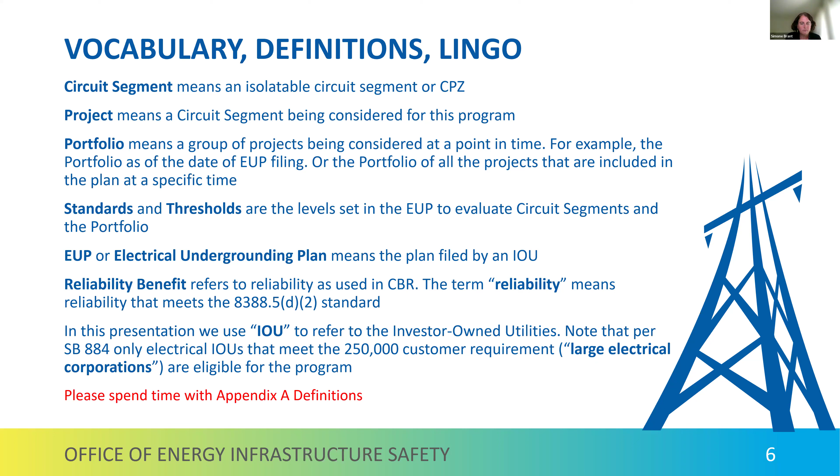There are three main components of the guidelines. The first is the portfolio mitigation objective—that's what you're hearing us refer to as the D2 standard, which is whether the plan as a whole is achieving the substantial increase in reliability and substantial decrease in wildfire risk as defined by SB 884. The second component is the project acceptance framework, which is a 4-screen process used to select and prioritize projects. The third part is that we have quite extensive requirements in terms of data submission, model information, modeling and ongoing reporting. That's how we'll monitor over time whether the portfolio mitigation objective is being met, as well as whether the framework is being applied as approved.

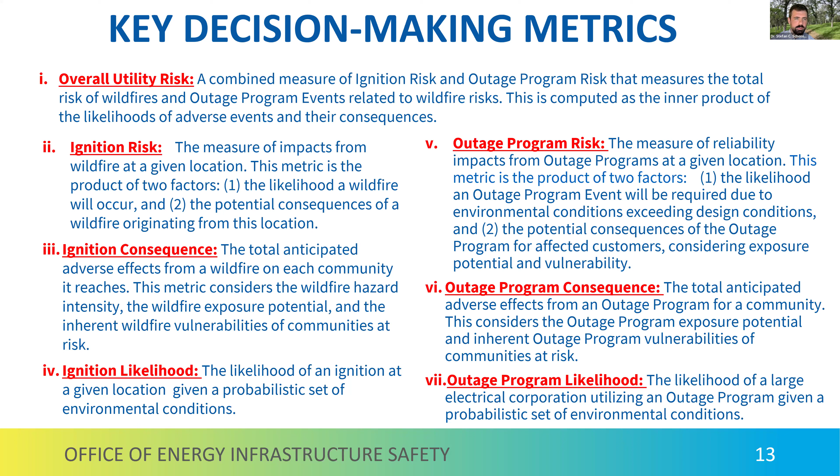The outage program likelihood, we have a slightly informal definition here just for reason of space. It's a little longer if you go to Appendix A and read it, but it's the likelihood of an outage program being given and also the expected time of that program. And we specifically ask for the IOU to detail how they balance out something like 3 2-minute outages versus a 10-minute outage, and we ask for some reporting on that.

Next slide, please. So with these key decision-making metrics, we've essentially identified 3 different types of projects which will achieve a substantial reduction of risk.

So the first and most basic type are what we call high-risk circuit segments. These are circuit segments that unmitigated exceed some type of high-risk threshold. This threshold, again, is measured only in overall utility risk. And in order to set up a success standard or a mitigation criteria, as we call it, we ask for the Electrical Corporation to define an explicit formula of overall utility risk and additional key decision-making metrics that they believe are important to establishing a successful project.

Our second type of project are ignition tail risk circuit segments. And the circuit qualifies for this program by having a consequence score which exceeds some predetermined threshold. Again, all of these thresholds we have not set exactly because we need to see the context of the entire system to understand what is a good threshold, what is not a good threshold. We ask for the IOUs to present a threshold in their plan, and we will review it and potentially make modification requests depending on their appropriateness.

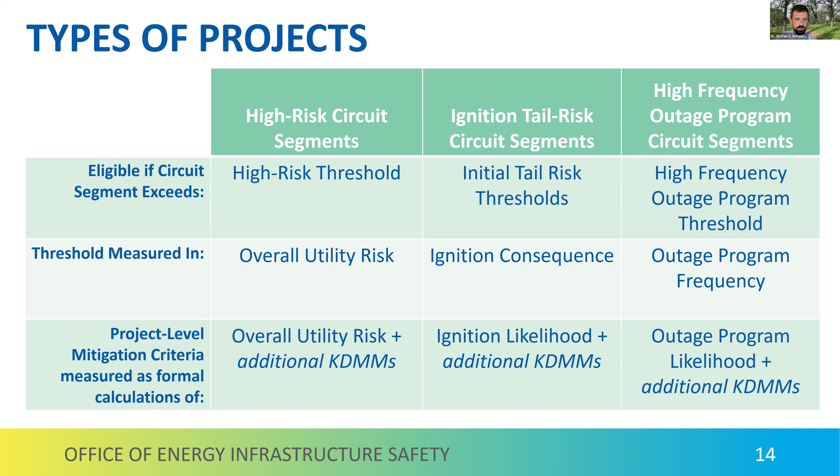This is measured in outage program frequency, which we have a slightly longer, more formal definition in Appendix A that you should check out. And this one, we don't have a mismatch. We measure the success of this in our outage program likelihood measurement, but then if there are additional metrics which the IOUs believe are important for valuing these projects, we leave some room for them to propose the actual formal success criteria.

So we'll do a quick explanation again of each of these types of projects measured here on a risk matrix. For those unfamiliar, there's lots of ways to do these. We right now have the x-axis as the likelihood of an event happening and the y-axis as a consequence. I should note these are example plots meant to help illustrate the concept. They are not drawn to scale, and they do not represent any formal thresholds which we've set. They're illustrative purposes only.

So again, here our risk is our product of our likelihood and our consequence. So the top right corner is high likelihood, high consequence events. This would be our most risky circuits. Things in the bottom left of this would be low likelihood, low consequence, and not risky. So in red, we've marked a circuit which is a high risk circuit.

Then after doing some mitigation, potentially undergrounding, which only affects the likelihood of the adverse event at that circuit, you see it is moved all the way over to the left into some safe zone defined by this mitigated risk threshold. Again, thresholds that we have not set formally because we need to see all of the context information in order to set them appropriately.

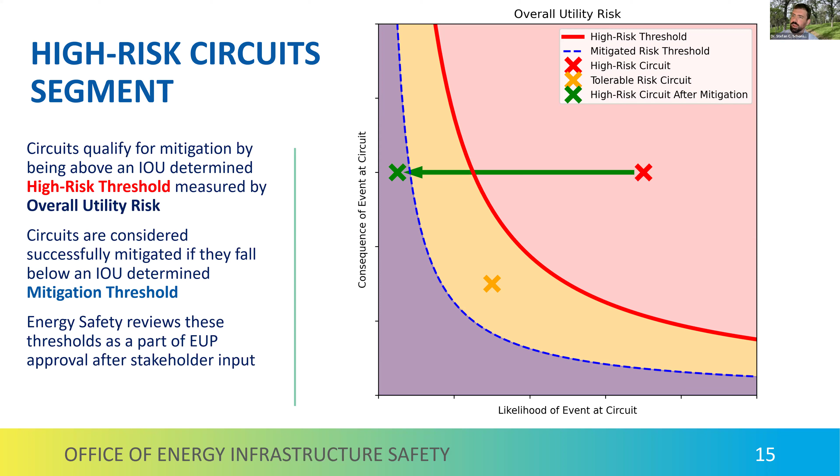So next, one more thing on the previous slide, if we could. I just want to note that we are here showing this in overall utility risk. So we look at likelihood of the event and consequence of the event. This is a combined measure of the outage program risk and ignition risk. Thanks. Next slide.

So outage program risk, or high frequency outage program circuits, are measured in outage program risk. So now our x-axis is the likelihood of an outage program at the circuit, and the y-axis is the consequence of that program. Here we are narrowing in on these high frequency power outage circuits. So the threshold is a measurement purely of likelihood of the outage program.

The success threshold, again, we haven't set a specific one, but we've drawn an example here of something that we'd like to see. This is a little different than the previous example, because we're only affecting likelihood with undergrounding. So when we measure the success of a program or a circuit being undergrounded through this program, it's important that the likelihood itself is much lower, that we don't really affect the consequence with this type of mitigation, and therefore the likelihood is the key determining factor in whether or not this is a successful mitigation.

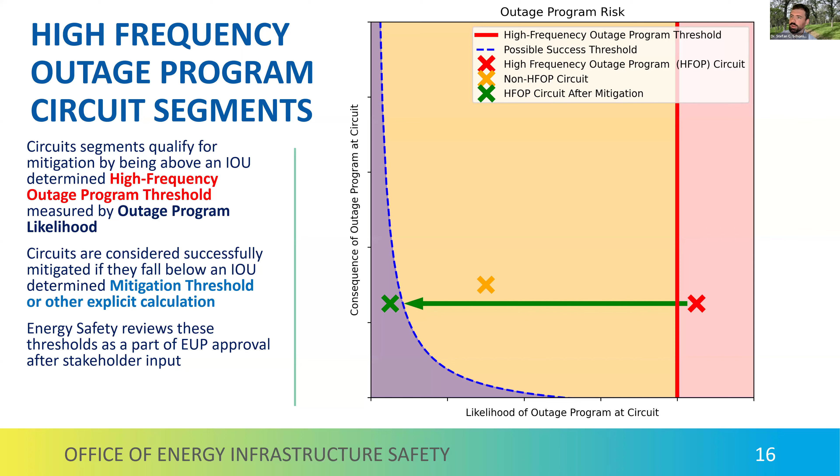The third type is our ignition tail risk circuit segments. Again, these ones are a little special because we're concerned with the consequence of an ignition at a particular circuit segment. If this consequence score is very high, then there is an argument that it should be mitigated regardless of likelihood. However, what exactly that consequence threshold is, is something that we need to determine, and we need more context information in the EUP in order to decide.

And since we're measuring the eligibility for this program in consequence, and undergrounding only affects the likelihood, measuring success here is a little bit more complicated. Rather than prescribing a specific formula for success here, we ask for the electrical corporations to define a success criteria in their plan, which we will review and comment on as part of our process. Next slide, please.

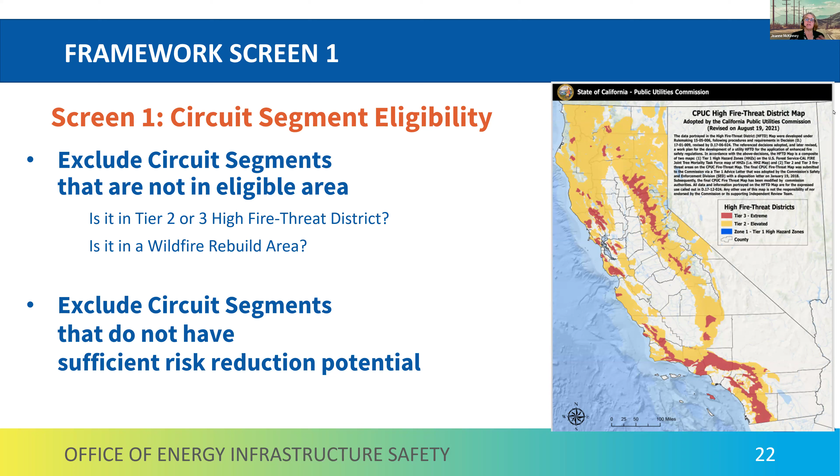And then the second part of screen 1 is to exclude circuit segments that don't have sufficient risk reduction potential. In other words, if they don't have a significant amount of risk, those aren't the ones that should be part of the program. So, next slide.

And then, as Stefan said, there are 3 different ways that a circuit segment might be deemed risky enough to be part of the program: the overall utility risk threshold, the ignition consequence threshold, or the outage program reliability threshold. And the ignition consequence threshold is the one that applies to tail risk. So if a circuit segment doesn't exceed any of these thresholds, it is not going to be part of the program, and it's eliminated in screen 1.

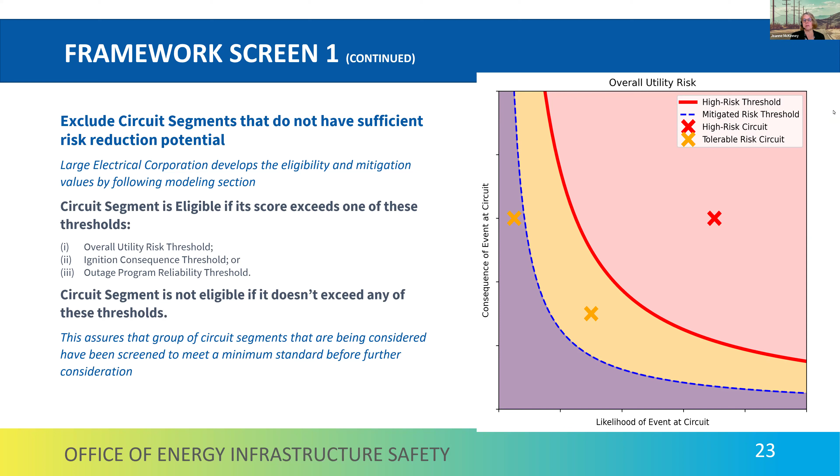So this is a very important part of the process, because this is what determines that we're working with a pool of circuit segments that really need this attention. And to go over to the matrix again, the risk matrix: the red X, that's the theoretical circuit that is above the red line, which is the high risk threshold. The yellow X's, one is in that yellow field, which is considered tolerable. And then the other one is in the purple zone, which is actually where we're looking for a mitigated project to be risk-wise after the mitigation.

So, next slide. Screen 2 is really about information and the alternative mitigation comparison. This is where we have required the utility to provide most of the information that's already listed in the CPUC resolution. SPD 15 has that appendix 1 with a long list of data. So we want that data to be part of what the utility gives us with screen 2.

And then they'll do this, and that includes some information on the alternative mitigations. Energy Safety will then use this because it will help us understand the potential for the plan to reduce risk and help us evaluate the portfolio mitigation objective and whether the plan is going to meet that.

However, when screen 2 is performed, the utility may not have all of the information. If that's the case, instead of using project-specific information, they might be using estimates, aggregates, assumptions. For example, for circuits located in a certain area, we're just going to do an estimate for their risk values and how much alternative mitigation would cost, et cetera, et cetera.

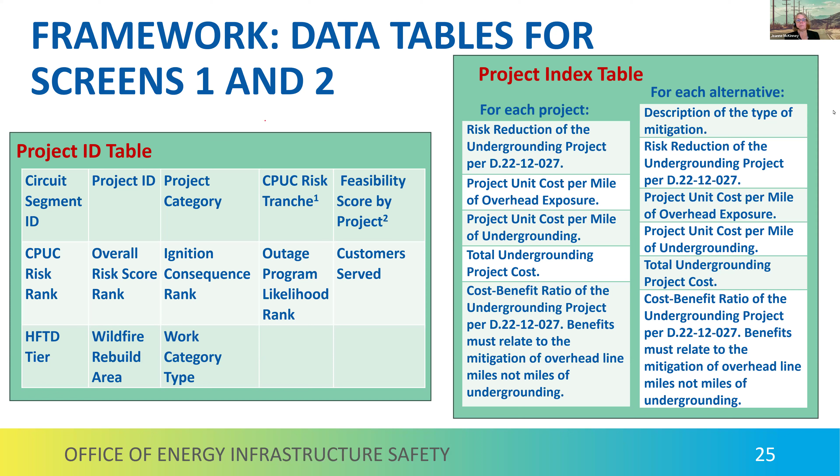So next slide. Screen 3 is the project risk analysis. To complete this, we do need the project specific information, so we need to look at it in the context of the portfolio. To do this risk analysis, the utility is going to have done some scoping and design work where it's got to be somewhere in that process to have enough information to do this risk analysis. So once a project has reached that point, it can be put through screen 3, assuming it's already past screen 1 and 2.

One of the things that's important about screen 3 that's different from screen 2 is it really incorporates that time element if there is a long delay in a mitigation being implemented.

And again, we'll see a lot more about this in the modeling and data section, about exactly what information we're looking for and why and how it's being used. It's going to generally help us understand how an individual project will support that overall risk reduction goal for the plan, which we call the portfolio mitigation objective. And it does use all 7 of the KDMMs, the key decision-making metrics, the mandatory ones.

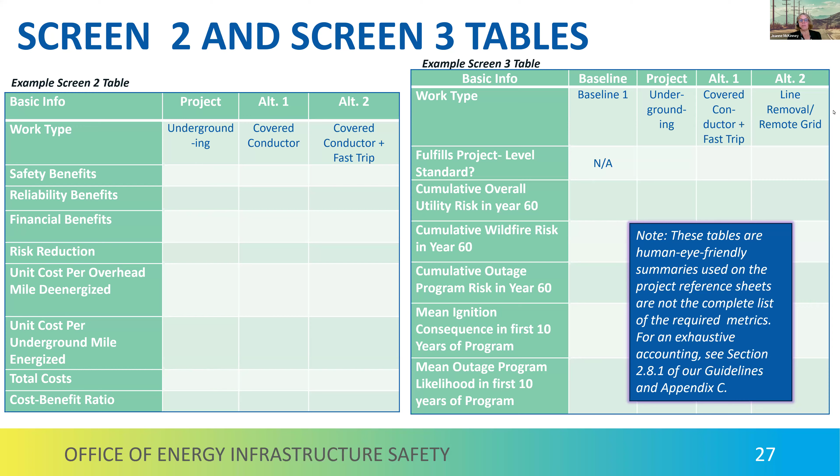Okay, next slide. So finally, we get to screen 4. The statute requires that the utility propose a means of prioritizing based on these 4 factors. So in the plan, the utility must propose a definition for each of these and then explain how they are going to use them to prioritize projects.

And so this would only apply after a project has already gone through the screen 3 comparison. And obviously we would need more than one project in screen 4 to prioritize. So we're asking for at least 25 in the original plan, and then as additional ones pass screen 3, they can do a reprioritization.

And next slide. Okay, this is kind of a summary of a little bit about the screens. Screen 1 is to identify the eligible circuits, create a list of projects. Screen 2 is to get that information for the CPUC, including the alternative mitigation comparison. And screen 3, the project risk analysis, is really going to allow Energy Safety to do its analysis of a project.

And we would be doing this after the plan is approved. So it's key that we are clear about what information is needed and that we're collecting the right information. We'll talk about that in a later slide.

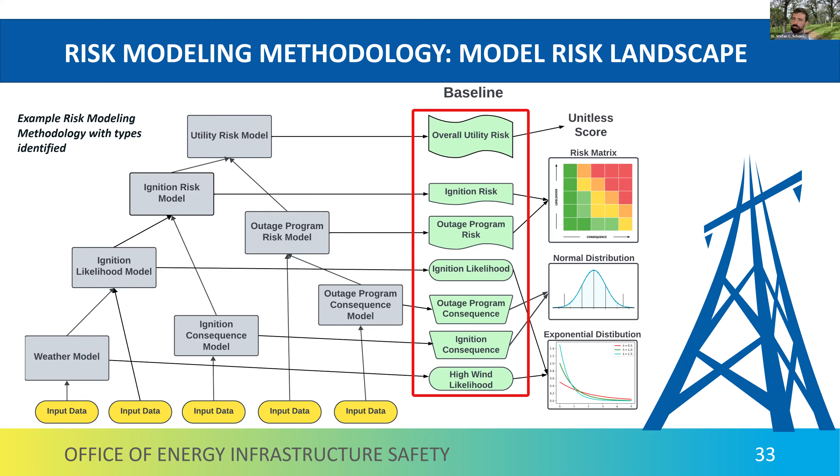The next part is the calibration. This is our set of the scenario calibration, depends on what training data we've added in, what historical data we're looking up in an actuarial sense. This is our lower level, has not changed in versioning, but may change specific calculations based on new real world data.

The next argument is the portfolio. The portfolio is the set of projects which we are modeling. A baseline model risk landscape would have no projects in year 0, or when we establish a new baseline, any projects which are finished will be included already in this model. Any currently in construction should be modeled as they finish, but we would assume no new projects in that portfolio, which I'll use the uppercase P for in the formulas.

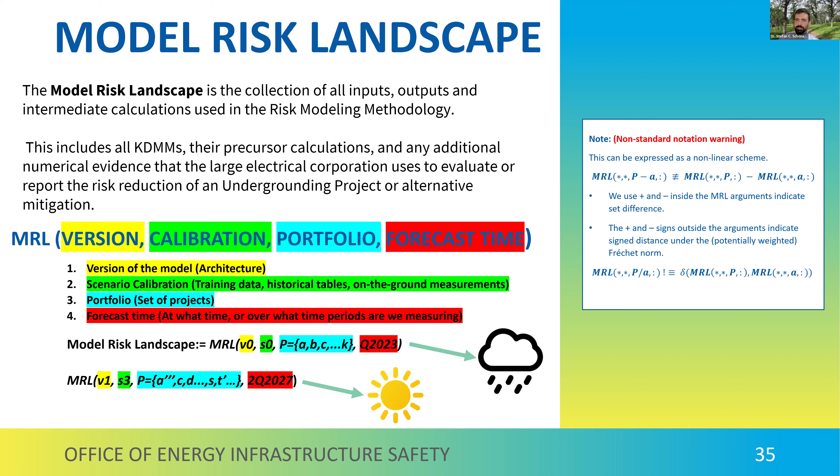Before we get to core capabilities, I wanted to take a moment to talk about the difference between this approach and the cost-benefit analysis that the CPUC has implemented through their rulemaking process, R2007-013. We are not asking for a new system. We are instead looking for the IOUs to report on their risk modeling methodology with some upstream numbers before the numbers go through things like risk scaling, dollarization, interest over time, and similar things which can obfuscate the interpretable and statistical quantities that we are interested in collecting and validating.

So again, none of these numbers are new. They're just numbers which we are requiring to be reported in a new way. This is in no way adding any kind of requirement to develop new models or a separate system, just a separate way of showing your work for arriving at those cost-benefit analysis numbers. Specifically, we're requiring metrics to be reported in natural units and at a finer spatial and temporal granularity than the CBA approach, and without any kind of risk attitude scaling applied to consequences or risks, in order for us to conduct our probabilistic risk assessment.

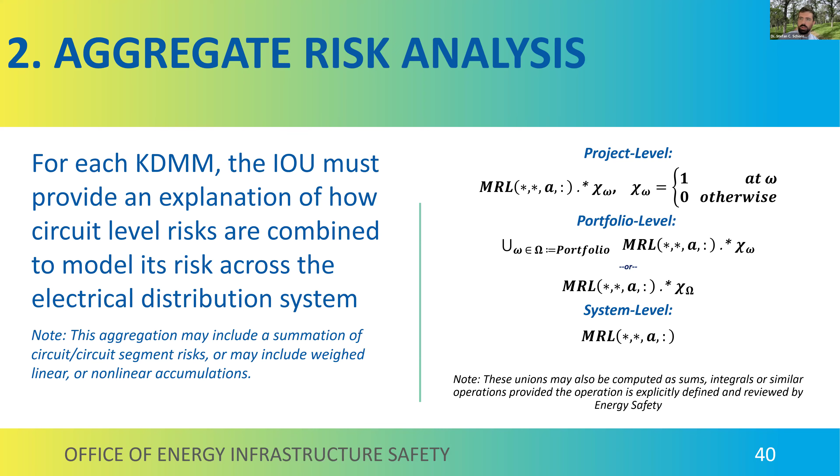In terms of the way that we collect this data, we'll talk about data collection in more detail later. But for each project, we develop a project reference sheet, a human-eye readable way to understand the efficacy of a single project. That'll report both project level information and portfolio level information. We also have a portfolio cover sheet, which looks at the more macro effects of the program at the portfolio level and the system level, again a human-eye friendly way to understand this information.

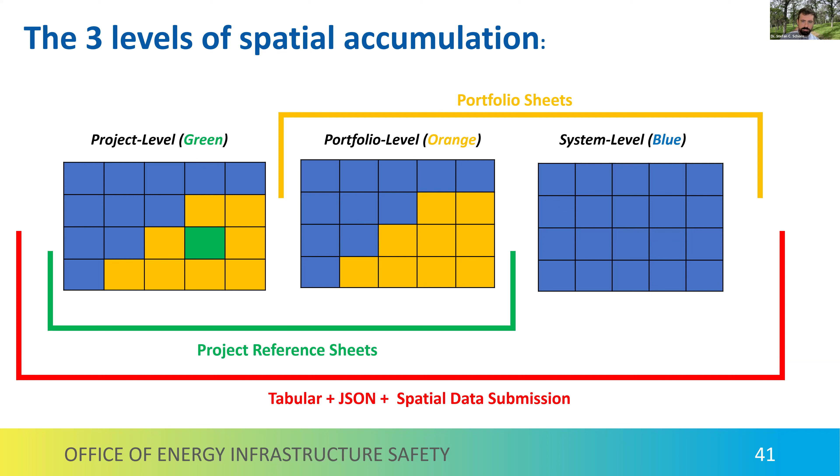And finally, we are also doing extensive data collection through a tabular submission, a JSON submission, and a spatial data submission, which captures all of the information on these reference sheets and additional information that is too granular for a human eye or human mind to just look at a spreadsheet and understand, but is useful for modern big data applications.

So core capability 3 is ignition and outage risks as separate and collective risks. We asked for the Electrical Corporation to detail its method for evaluating ignition risk and outage program risk through separate and combined metrics. If we define the set I to be the set of metrics which measure ignition risk, and O to be the set of outage program risk metrics, we require that the intersection of these sets be non-empty and the mutual union also be non-empty, and understand how exactly these ignition and outage risks are balanced against each other in an overall utility risk score.

I think there's a next slide, please. Here's a visual representation of the idea. Again, we have a Venn diagram of metrics that are interested in wildfire risk, and metrics that are interested in electrical reliability. There are some metrics which are a measurement of both. For example, something like equipment risk, not a KDMM that we have required, but certainly one that we would be open to reviewing as part of an EUP submission. We'd like to know what metrics go with what ones, and how they are combined into an overall risk score.

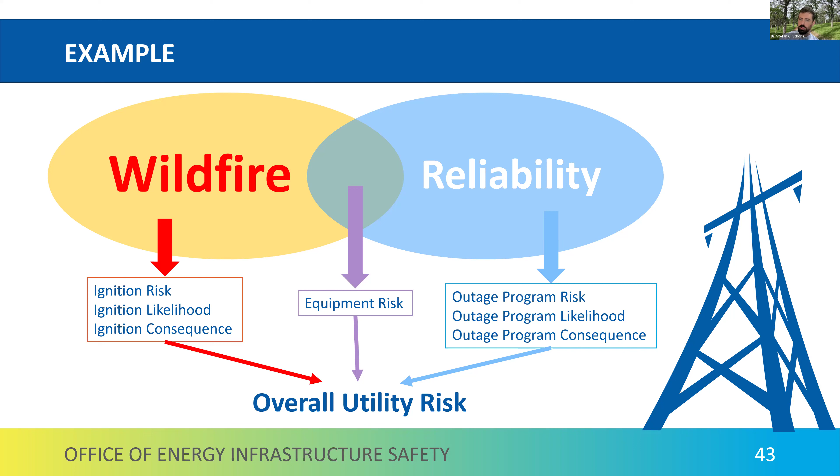Next slide, please. Core capability number 4 is future risks and the accumulation of risk over time. Following best practices for public investment, we'd like to model the effects of these activities over the expected lifetime of the equipment, which we have currently defined as 60 years.

There are certain types of these quantities that are accumulative, something like a likelihood. If we have a likelihood in one year and a likelihood in the next year, it's not just the direct sum of them that gives you the likelihood of one or more events happening in those two years. You want to apply best practice statistics for this if you are using a likelihood-based model. If you're using something with a different sigma algebra, you could write this as an integral. If you're writing this in more of a functor context, it might make sense to write this mathematically as a union.

The basic idea is understanding that there are certain types of quantities, like likelihoods and risks, which accumulate over time. We would require the electrical corporations to report on how they model this accumulation, how they account for it, and then make approximations through the lifetime of the program.

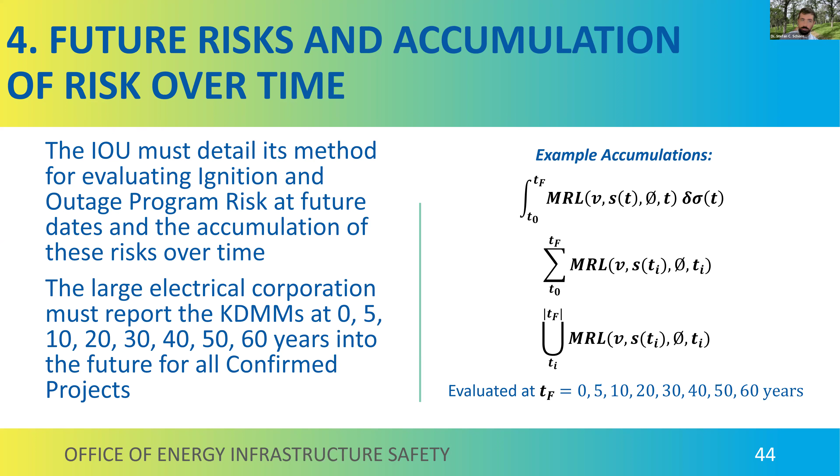Core capability 5: establishment of baselines and historical calibrations. The IOU must demonstrate how it ensures the risk modeling methodology is kept up to date, and how comparisons between projects in later years of the program are made against a present baseline instead of a historical baseline. However, we do require retention of models and model calibrations so that when a new version of a model is introduced, there is sufficient back testing to understand how this model differs from the previous one.

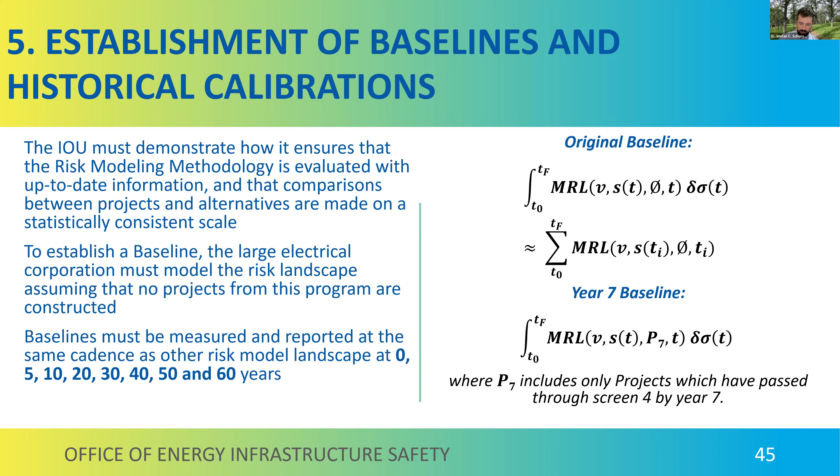On my math slides, our original baseline depends on how we're accumulating this over time, saying what happens if we have no projects. If we want to establish a new baseline in year 7 to evaluate a new project, we should make sure we are including all of the projects which have already been completed and any project currently under construction, modeling it as completed in the appropriate year in this model risk landscape calculation.

As we get modeling updates to the version, calibration updates, or finished projects—for example, if a line is successfully undergrounded, that changes the risk landscape of the system—there will have to be an establishment of new baselines. Old baselines will be recorded and used to establish model reliability over time and measure risk reduction over time. New baselines will be used for backtesting projects and evaluating new projects, and of course, new projects should always be evaluated on the most recent baseline.

Next we have comparisons with alternative mitigations. In the guidelines we require at least 2 alternative mitigations for each project. We want to see the model risk landscape using the same versioning and calibration as the project is evaluated under, and we ask for both a separate analysis and a collective analysis. For the separate analysis, we ask: what if you did no other projects, only did this alternative? How would it affect the landscape?

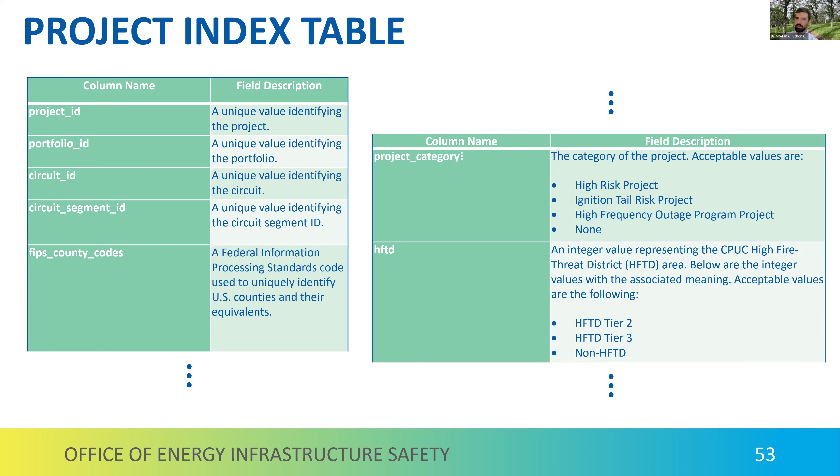So next, yep, thank you. So then project risk reduction, project unit cost per overhead mile de-energized, unit cost per underground mile energized, total costs, cost benefit ratio for the undergrounding project.

And then for each of the alternative mitigations considered, these will be additional columns in this table, whereas they're reported in the rest of our data as individual rows. So for each of the alternatives, give it a number, tell us what type it is, give us the amount of risk reduced, give us the unit cost per overhead mile de-energized, per underground mile energized, not for all alternatives unless it's some kind of hybrid project, with specific instructions on that in Appendix C.

Alternative project total cost, alternative project cost benefit ratio. And so once, if you've looked at this and there's a project you'd like more information on, but you're not ready to do a deep dive into all of the extensive data collection, we have our project reference sheets.

Next slide, please. So again, the idea of the project reference sheets is not that someone's going to go in and read every single project reference sheet, but to have an idea of where you can understand more detail on a single project without having to go through the extensive data submission.

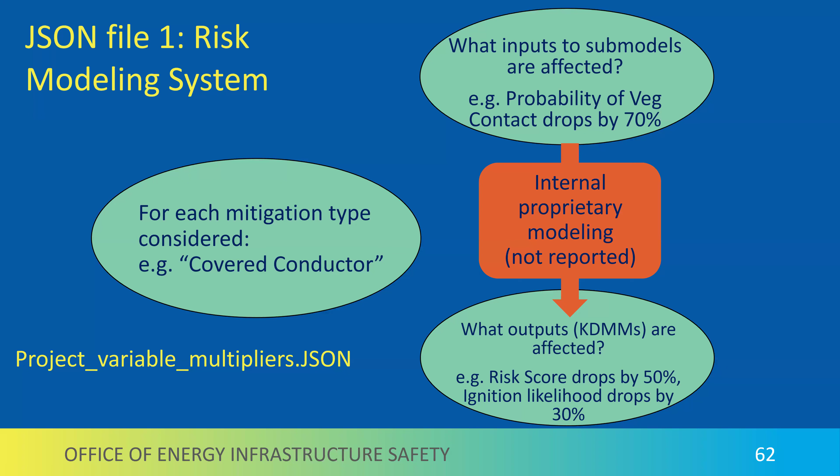Again, I'm probably going to sound a little bit like a broken record here, and I apologize for that, but I'm going to ask it again. In this instance, will you ask for the data at a project level, or will the project be a circuit? The granularity here is still going to be at the circuit segment level, is that correct? Yes. So how will an alternative that covers more than that circuit segment be represented at the system-wide, plan-wide level?

I would say that I think the idea is that they are going to consider an alternative along just the same size as the original project. It may cover different parts of it, right? As we talked about before, undergrounding doesn't mean you underground every single foot of that line. It might mean you underground certain parts of it. And if you change those things, you'll be effectively changing the version of the project.

As far as applying different mitigations, we are also asking them to consider, if they applied that mitigation to this project and they have some parameters on how much they apply and where it goes, that's going to be defined in the more detailed narrative section of the modeling. So I think ultimately, if they are going to have the pieces outside of the circuit folded in, they'll have to have explained that to us. But most likely, I think we're asking them just to report on doing this within the boundaries of the circuit segment.